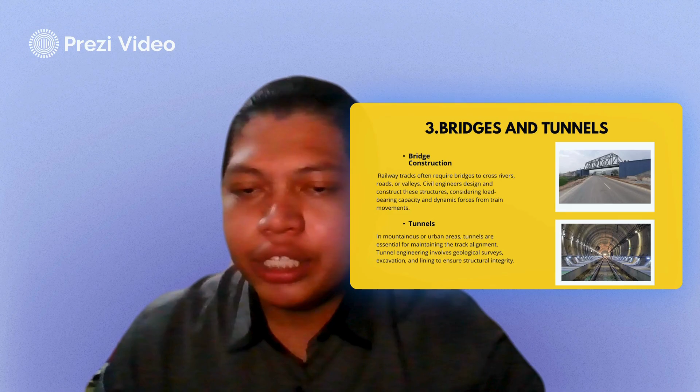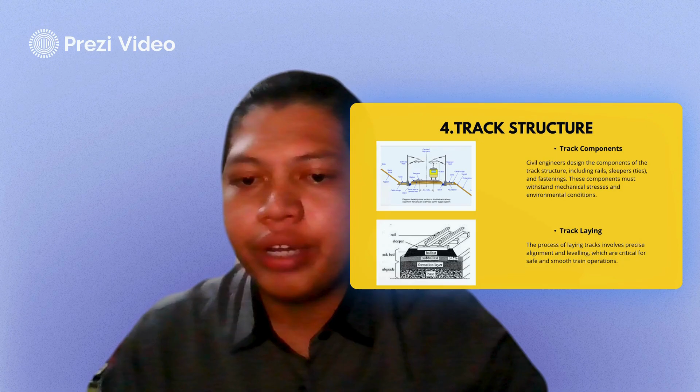Lastly, we have track laying. The process of laying track involves precise alignment and leveling, which are critical for safe and smooth train operation. That's all, thank you.

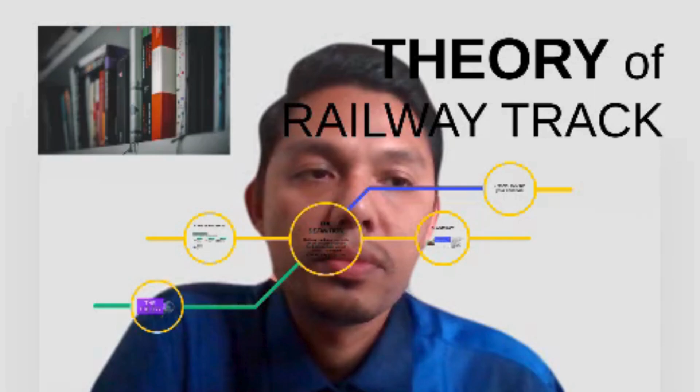What exactly is a railway track? In simple terms, a railway track consists of two parallel steel rails that guide the wheels of a train. These rails are securely fastened to sleepers, also known as ties, which are embedded in a bed of ballast. The ballast is usually made of crushed stone, providing stability and drainage.

The main function of a railway track is to provide a stable and smooth surface for trains to travel on, ensuring safe and efficient transportation. This design has been refined over centuries to handle heavy loads and high speeds, making it essential for both passenger and freight transport. Railway tracks are more than just steel and stone; they are the backbone of our rail transport system, enabling connectivity and economic growth.

Next, let's dive into the theory behind railway tracks. Understanding the theory helps us appreciate the engineering marvel that allows trains to operate smoothly and safely. Track geometry involves several critical elements.

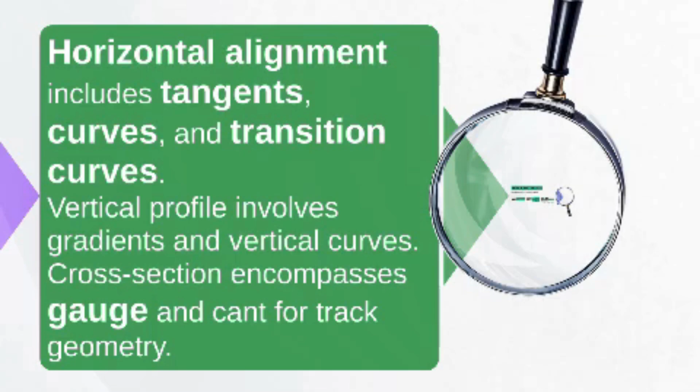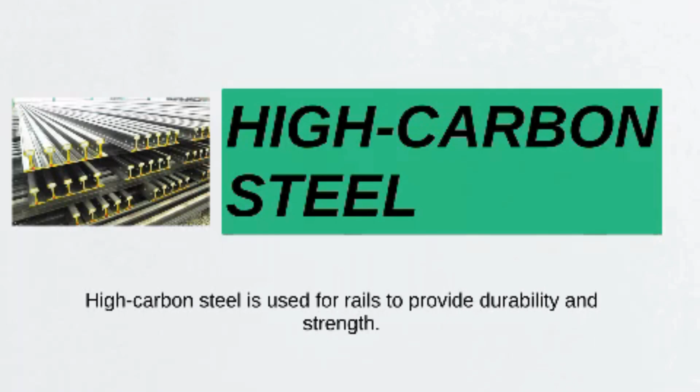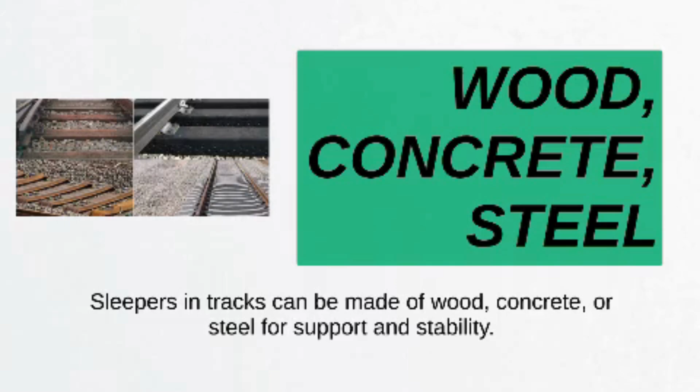The sleepers can be made from wood, concrete, or steel. Concrete sleepers are commonly used today because they are durable and require less maintenance. Lastly, ballast - crushed stone that provides stability, maintains track position, and helps with drainage. Properly packed ballast is crucial for the track's longevity.

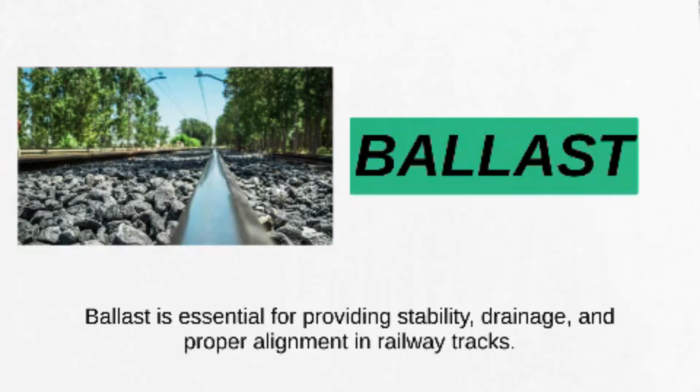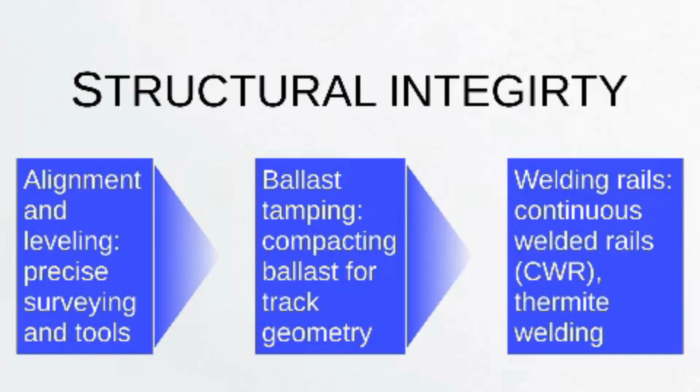Structural integrity involves precise alignment and regular maintenance. Alignment and leveling: the track must be correctly aligned and leveled to ensure smooth and safe train operation. This is achieved using sophisticated surveying equipment and alignment tools.

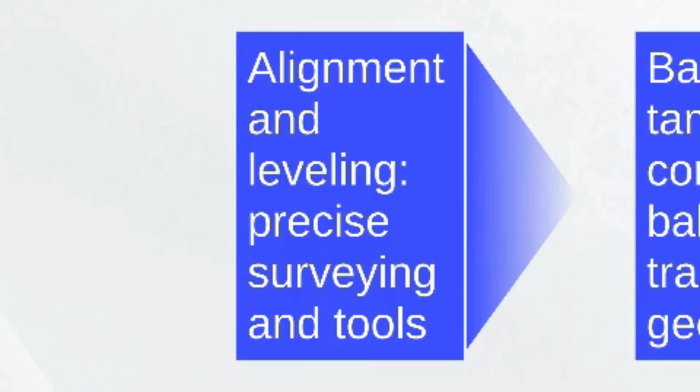Ballast tamping machines compact the ballast around the sleepers to maintain track geometry. This process is essential for preventing the track from shifting under the weight of passing trains.

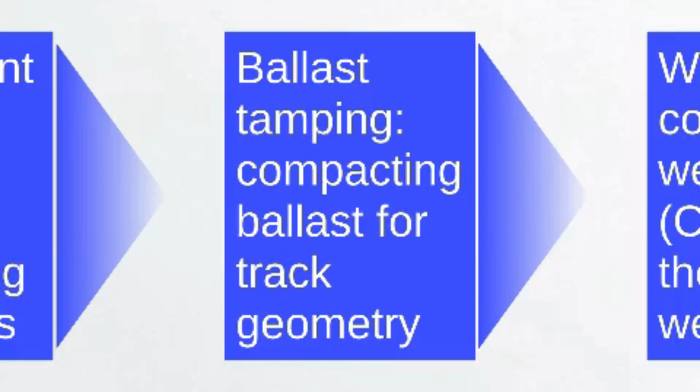Welding rails: modern track welding often uses continuous welded rails, or CWR, to reduce joints which can be weak points. Techniques like thermite welding are used to join rails seamlessly, providing a smoother ride and reducing maintenance needs.

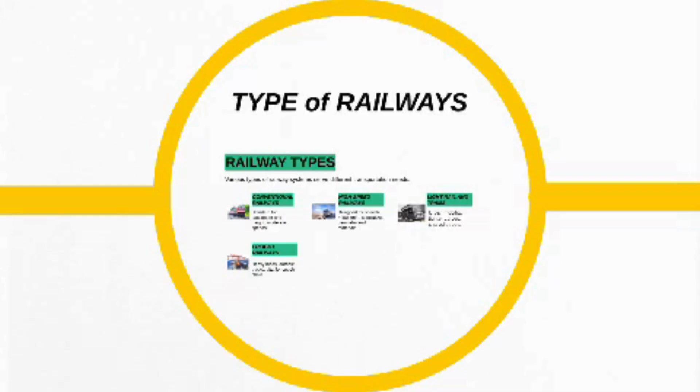Now let's go explore the different types of railways, each designed for specific purposes and conditions. Understanding these types helps us see how versatile railway systems can be.

Conventional railways are standard railways used worldwide. They are designed for both passenger and freight trains and typically have moderate speed. Conventional railways form the backbone of national and regional transportation networks, providing essential connectivity.

High-speed railways are engineered for speeds exceeding 250 km per hour. They have specialized track geometry with smoother curves and stronger materials to handle high speed. Examples include the Shinkansen in Japan and the TGV in France. High-speed trains offer rapid transit between major cities, significantly reducing travel time.

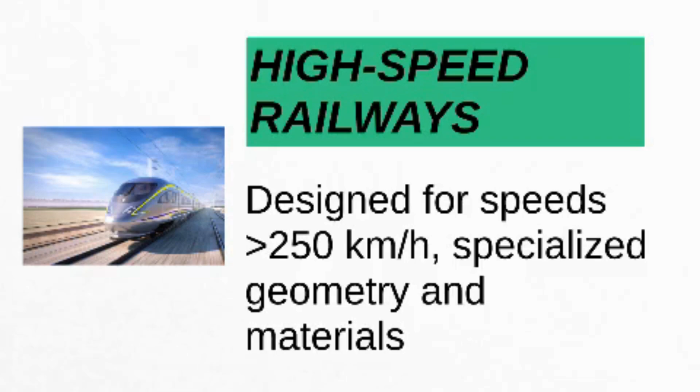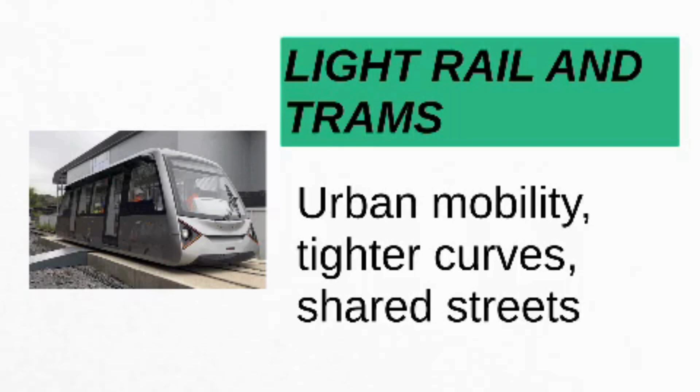Light rail systems, or trams, are typically used within cities for shorter distances. They are designed to navigate tighter curves and can operate on shared streets with other traffic. These systems are crucial for urban mobility, providing a convenient and efficient alternative to cars and buses.

Lastly, freight railways are designed to carry heavy loads over long distances. Freight railways are essential for transporting goods and raw materials. They often feature stronger and more durable track to handle the increased weight, and are a vital part of the global supply chain.

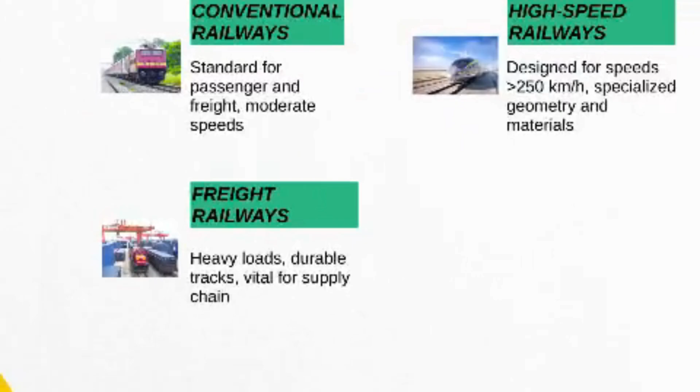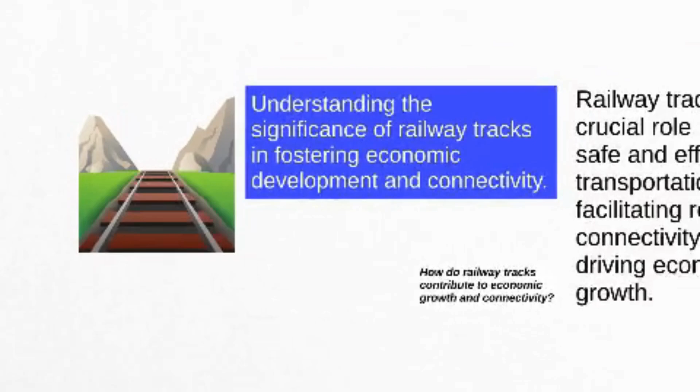So to sum up, we've covered the definition of railway tracks, the theory behind their construction, and the different types of railways. Railway tracks are a fascinating blend of engineering and practical design, crucial for efficient and safe transportation. They are integral to our daily life, enabling economic growth and connectivity across regions.

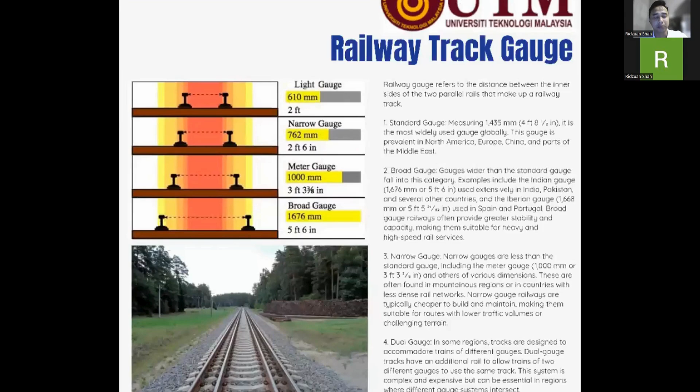Okay, we move on to the railway components. A rail track consists of a few elements, including the rails itself, made of steel, and the sleepers.

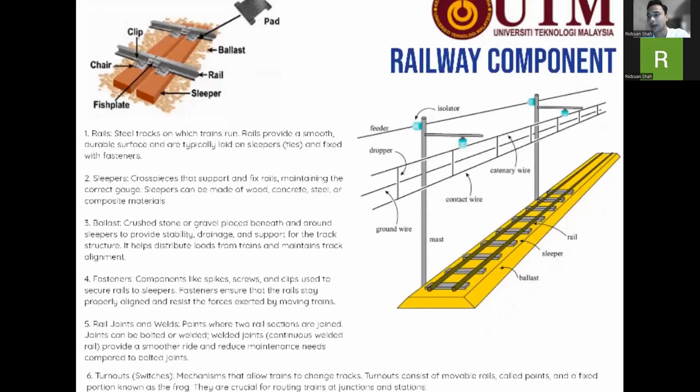Sleepers are usually made of timber or concrete, just to support and hold the position of the rail. We also have ballast, made of crusher run or aggregate, just to form the level to put the track on.

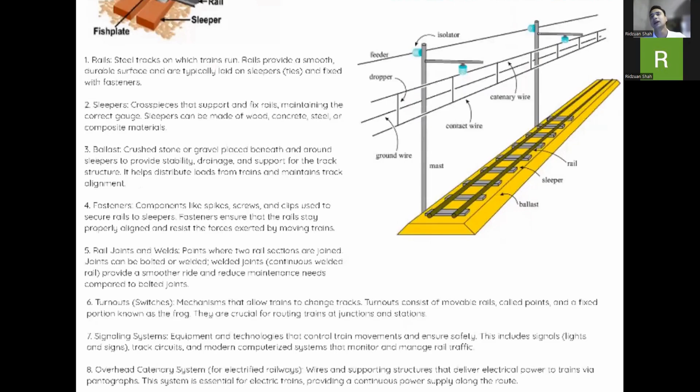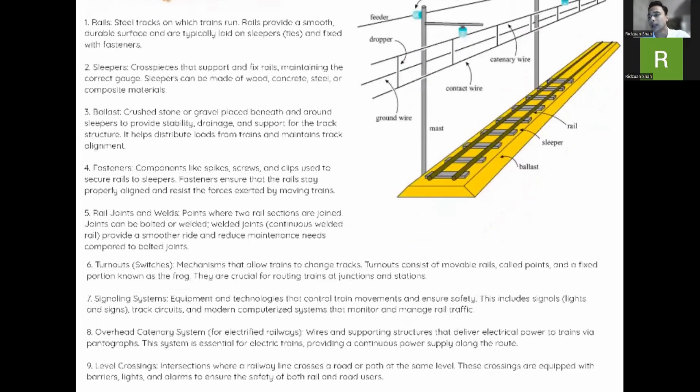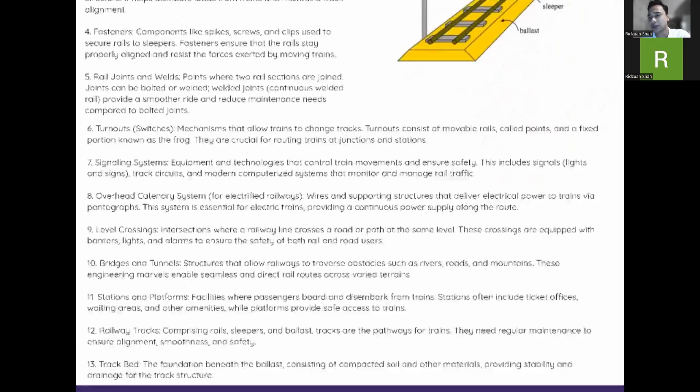Next, we also have fasteners to bind or hold the track to ensure it's in position. We also have rail joints, turnouts and switches, and the signaling system to support the operation of the train, as well as the overhead catenary system.

This overhead catenary system is used for electrified railways to supply electricity. You can see it on the track, connecting to the train itself.

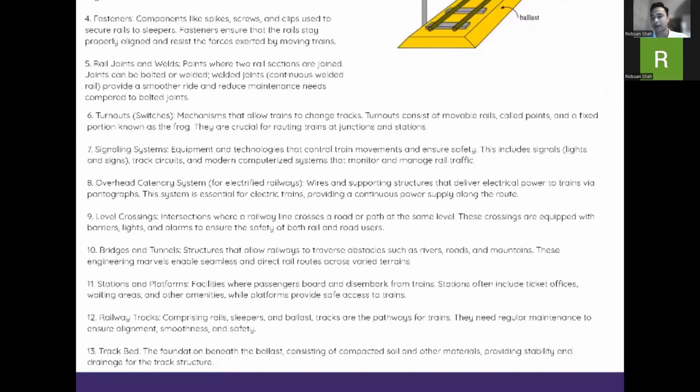Bridges and tunnels are another form of the track, but the components I mentioned previously still have to be present, whether it's on the ground, on a bridge, or within a tunnel. The station and platform are ancillary buildings to support the whole operation of the train, along with the railway track itself and the track bed.

So this is some photo for your reference, showing all the components that I mentioned previously.

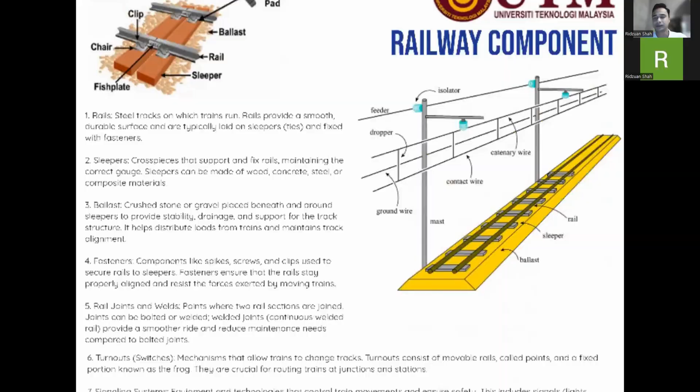Now I'm going to discuss our case study. We have decided to select one of the current projects that's ongoing right now, the electrified double track rail project from Gemas to Johor Bahru.

Under this case study, we are going to discuss the project background, types of railway track, the components of railway track, and how the construction is being conducted throughout this project.

The electrified double tracking rail project from Gemas to Johor Bahru marks the final segment of the KTMB network upgrade from single to double track.

Upon completion, this project will link the southernmost part of Peninsular Malaysia to Padang Besar, Perlis.

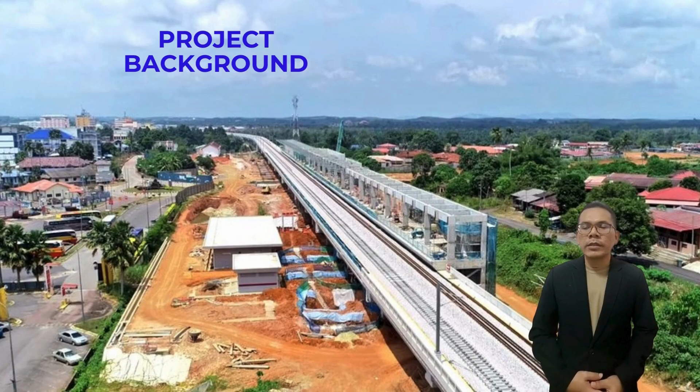The project encompasses 192 kilometers. The infrastructure work will include earthwork, ground treatment, drainage, tracks, box culverts, landscaping work, and hydroseeding turfing.

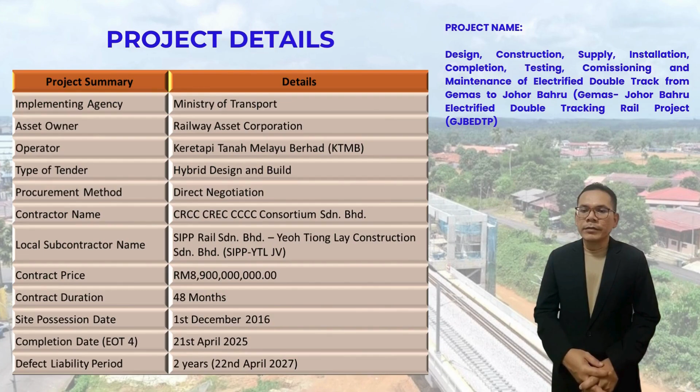The completion date, based on EOT number 4, is 21st of April 2025.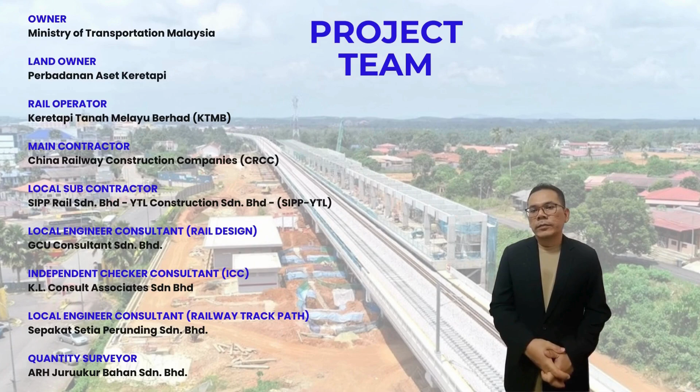The objective of this project: first, to provide comfortable, high quality and user-friendly rail services.

Second, improving the quality of rail infrastructure from Gemas to Johor Bahru. And last but not least, enhancing rail operation safety itself.

As shown here, this project's route distance is about 192 kilometers, and the operational speed of ETS maximum is 140 km per hour.

The best thing about this project is that throughout from Gemas to Johor Bahru, there will be 11 ETS stations constructed.

This project also has rail track on elevated rail at 3 places, which is at Buluh Kasar, about 0.5 km.

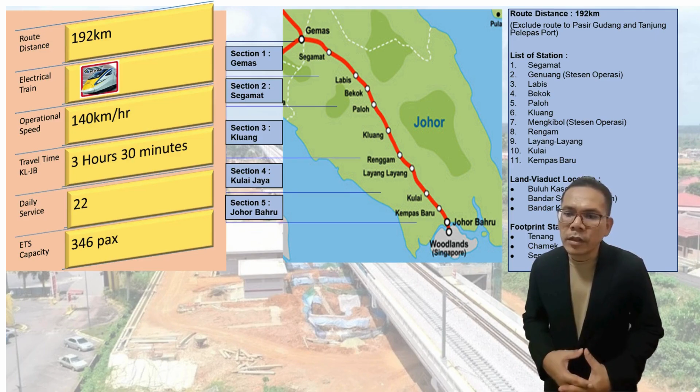The other elevated sections are at Bandar Segamat, about 6 km, and Bandar Kluang, about 3.5 km.

The scope of the project: first, constructing 192 kilometers of electrified double railway track, and constructing 11 stations along the route, as mentioned before.

Constructing electric train depots for both heavy and light maintenance, and constructing land viaduct bridges for elevated railway track.

Developing electrification, signaling and communication systems for the railway track, and constructing infrastructure works.

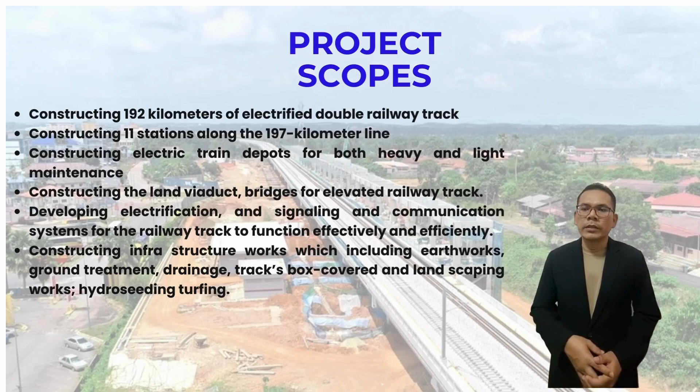This includes earthwork, ground treatment, drainage, tracks, box culvert, and landscaping work, hydroseeding and turfing.

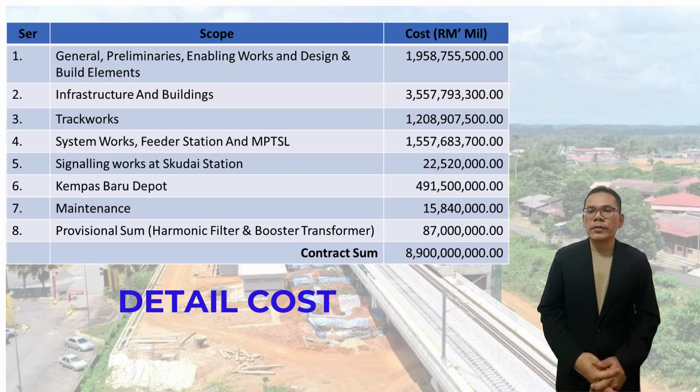Now the detailed cost of the project: the total contract sum is 8.9 billion ringgit Malaysia. The most expensive scope is infrastructure and building works, which earns about 3.5 billion.

Also shown here is the progress of the project as of the end of 23rd April 2024.

The progress is about 96.94%, which is a delay of about 0.05% from the target.

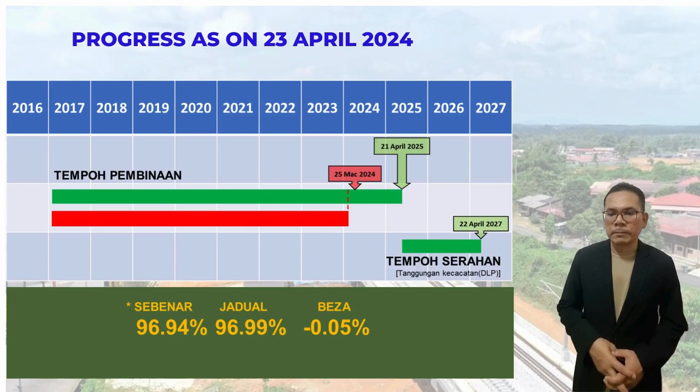Now I'm going to discuss the types of railway track being used in this project. Basically, there are 3 types of rail track.

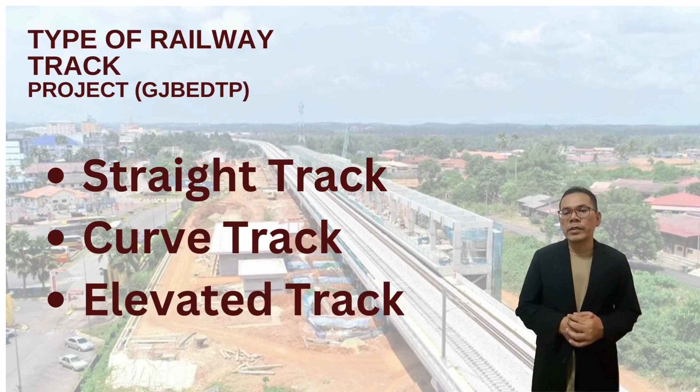First is straight track or continuous track, curved track, and elevated track.

A straight railway track is a section of railroad that is set out in a straight line without any curve or bends. Straight tracks are typically easier and less expensive to construct and maintain compared to curved tracks.

They also allow trains to travel at high speed, with no sharp turns to slow them down. Straight tracks are essential for long distance travel and high speed transportation, as they provide a smooth and efficient route for trains to travel.

Straight tracks also reduce wear and tear on the train wheels and tracks, leading to lower maintenance costs and improved safety. In terms of safety, straight track provides better visibility for train operators, allowing them to see far ahead and anticipate any obstacle or signal on the track.

This helps to reduce the risk of accidents and ensures smoother operation.

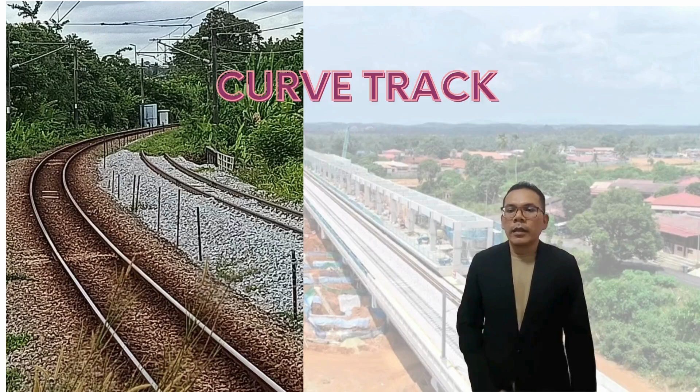Now I'm going to discuss curved track. In this project, they will use curved track, which is a section of railroad that is designed to follow a curve rather than being laid out in a straight line.

Curved tracks are essential for navigating around obstacles, following the natural contours of the land, and enabling trains to change direction.

One of the main challenges in designing and maintaining curved track is ensuring that trains can navigate the curve safely and efficiently. To achieve this, the curvature of the track must be carefully calculated to allow trains to travel at appropriate speed without excessive lateral forces or discomfort for passengers.

In terms of construction and maintenance, curved track require additional attention compared to straight track. The alignment and super elevation of the track must be carefully designed to ensure that trains can navigate the curve smoothly and safely. In this project,

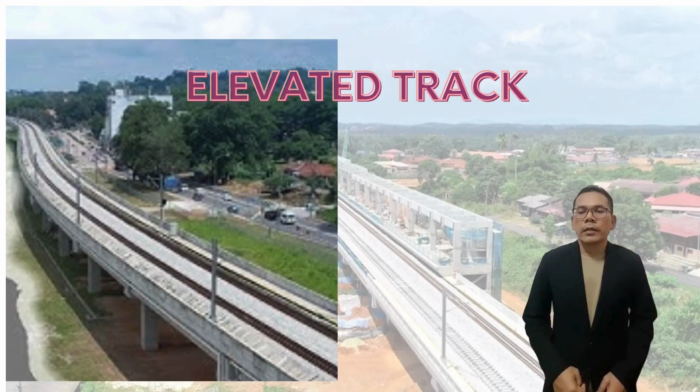they also have elevated rail track, which is a type of railway infrastructure where the tracks are built above ground level, typically on an elevated structure such as viaduct, bridges, or elevated platform. This design allows trains to operate on a raised platform separate from other forms of transportation like roads and pedestrian pathways. A crucial component of this project, the elevated railway especially serves multiple purposes and offers various benefits.

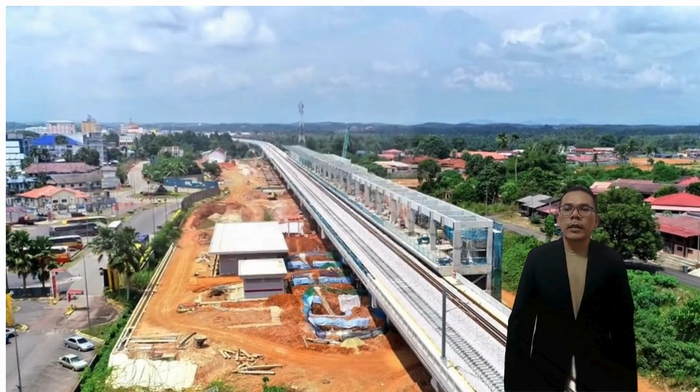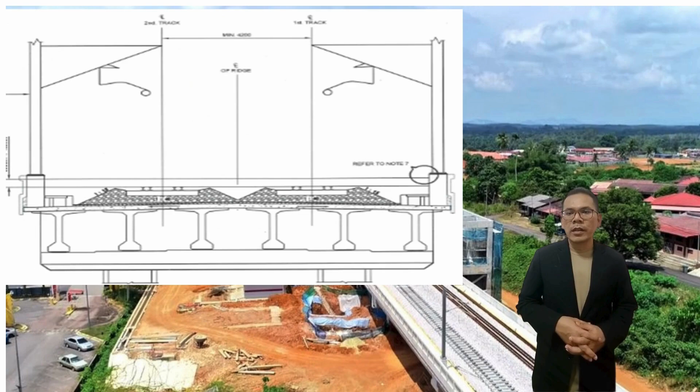The main railway track arrangement for an elevated railway is a sophisticated engineering endeavor that involves careful planning, design and construction. By elevating the tracks, railway can achieve better integration into urban environment, improve safety and enhance operational efficiency. The success of such a project depends on how you address the structural, operational and environmental challenges through advanced engineering and strategic planning.

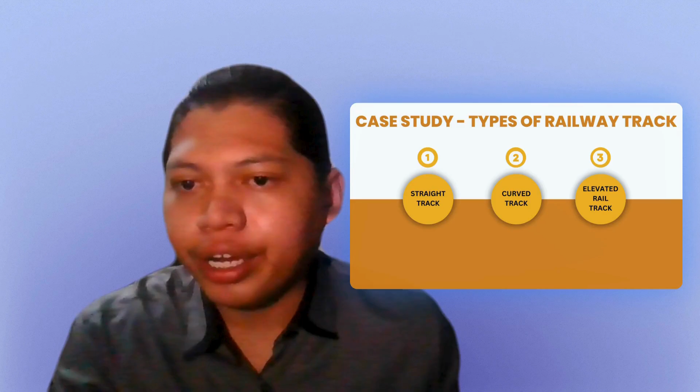For straight track, a straight railway track is a section of railroad that is laid out in a straight line without any curve or bends. Straight track are essential for long distance travel and high speed transportation as they provide a smooth and efficient route for trains to travel.

In terms of safety, straight track provide better visibility for train operators, allowing them to see far ahead and anticipate any obstacle or signal on the track. Overall, straight railway track play a crucial role in the efficiency, safety, and performance of railway transportation systems.

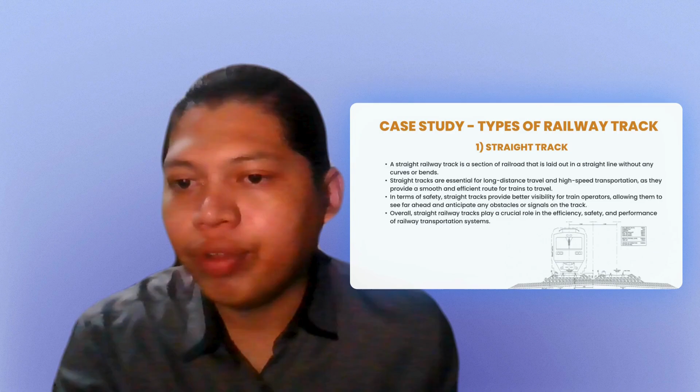Second, we have curved track. A curved railway track is a section of railroad that is designed to follow a curve rather than being laid out in a straight line. One of the main challenges in designing and monitoring curved track is ensuring that trains can navigate the curve safely and efficiently.

Curved track are often used in areas where the terrain is hilly or mountainous, as they allow trains to navigate around obstacles and follow the natural contour of the land.

In terms of construction and maintenance, curved track require additional attention compared to straight track. While curved track present unique challenges, they are an essential part of railway infrastructure, enabling trains to navigate complex terrain and providing flexibility in route planning.

Next, we have elevated rail track. An elevated track is a type of railway infrastructure where the tracks are built above ground level, typically on elevated structures such as viaduct, bridges, or elevated platform.

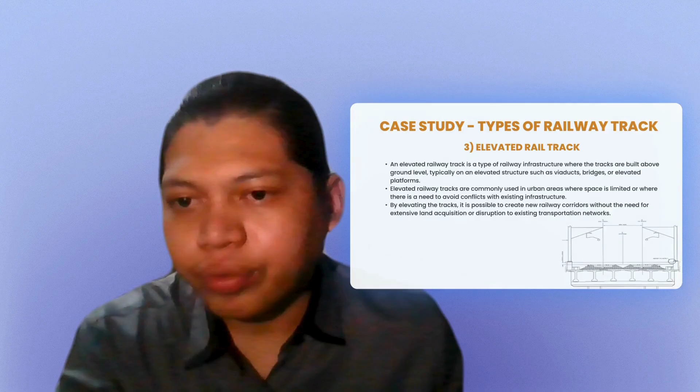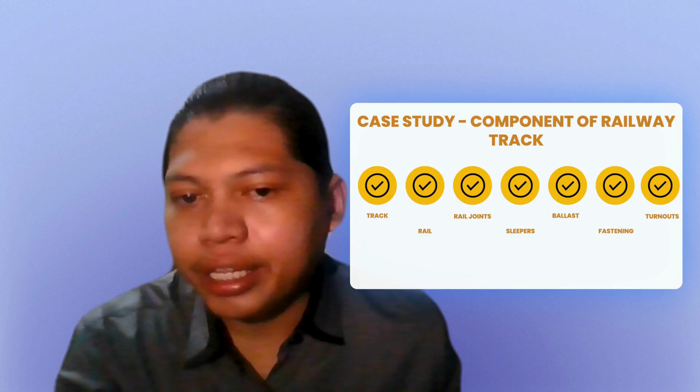Next, we have components of railway track in our case study. First, we have track, rail, rail joint, sleepers, ballast, fastening, and turnout. We will go one by one for these components.

First, we have track. The usual track consists of two steel rails secured on sleepers so as to keep the rails at the correct distance apart, the gauge, and capable of supporting the weight of the train.

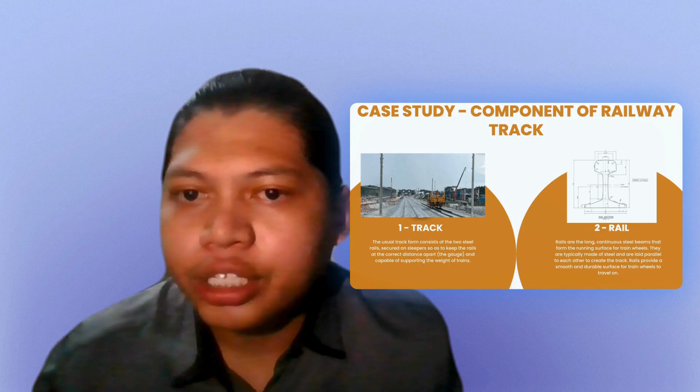Second, we have rail. Rails are the long continuous steel beams that form the running surface for train wheels. They are typically made of steel and are laid parallel to each other to create the track. Rail provide a smooth and durable surface for train wheels to travel on.

Third, we have rail joint. Rail joints are used to connect individual rail sections together. They allow for expansion and contraction of the rail due to temperature changes and help maintain continuity along the length of the track. Fourth, sleepers. Sleepers are essential horizontal supports that hold the rail in place and distribute the load from the rail to the underlying ballast.

They are typically made of wood, concrete, or steel, and are laid perpendicular to the rail at regular intervals along the track.

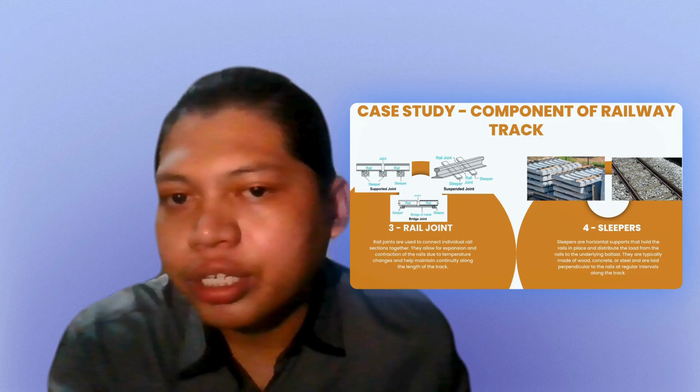Next, we have ballast. Ballast is a layer of coarse aggregates such as gravel, crushed stone, or slag that is placed beneath the sleepers to provide stability, drainage, and load distribution. The ballast helps to secure the track, maintain proper alignment, and provide a firm foundation for sleepers.

Next, fastening. Fastenings are the components that secure the rail to the sleeper. This includes rail clips, bolts, and other fastening systems that hold the rail in place while allowing for some degree of flexibility and movement.

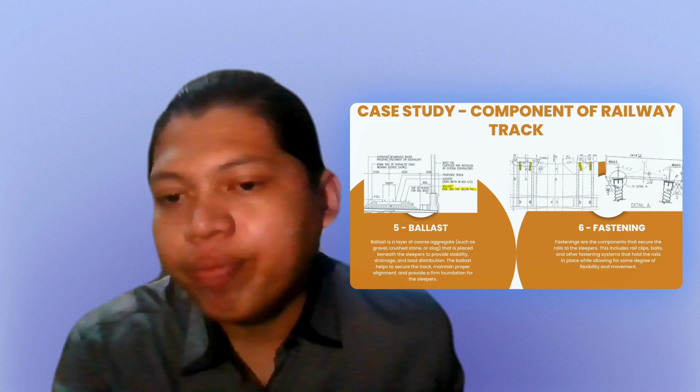Next, we have a case study for the method of construction for on the ground railway track. We have nine elements.

First, we have site investigation. Second, design and planning. Third, site preparation. Fourth, track formation. Fifth, track laying. Sixth, track adjustment and ballasting. Seventh, installation of ancillary systems. Eighth, quality control and testing. And lastly, final commissioning.

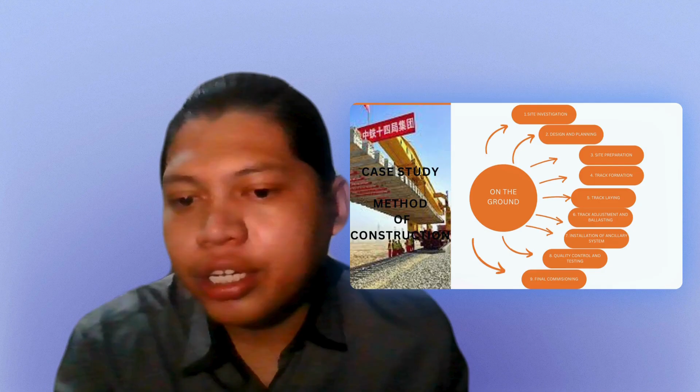Next, we have a method of construction for ground railway track. For this method, we have 9 items: first, site investigation; second, design and planning; third, site preparation; fourth, track formation; fifth, track laying; sixth, track adjustment and ballasting; seventh, installation of ancillary system; eighth, quality control and testing; and lastly, final commissioning.

For the first item, site investigation: assess the terrain, identify natural features, and map the area. Analyze soil and rock type to determine ground stability. Study water flow drainage and potential flooding issues. For detailed survey, conduct borehole soil sampling and lab testing to understand soil properties.

Second, design and planning. Design the track layout including curve, gradient, and straight section. Plan the foundation layer to support the track. Design the layer above the subgrade including ballast and subballast. Plan a system to manage water and prevent track flooding.

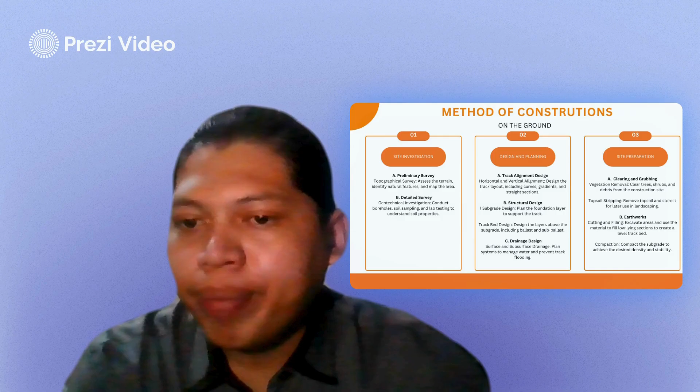Third, site preparation. Clear the trees, shrubs, and debris from the construction site. Remove topsoil and store it for later use in landscaping. Excavate the area and use the material to fill low-lying sections to create a level track bed. Lastly, compact the subgrade to achieve the desired density and stability.

Fourth, track formation. Grade and shape the subgrade according to design specification. Apply soil stabilization technique if necessary, such as lime or cement treatment. Lay and compact the subballast layer to provide a stable foundation for the ballast. Spread and compact the ballast layer, ensuring it is evenly distributed and level.

Fifth, track laying. Place sleepers at specific intervals and align them correctly. Use appropriate fastening to secure sleepers to the ballast. Position the rail on the sleeper. Secure the rail to the sleepers using clips, bolts, or other fastening systems. Weld rail joints to create continuous welded rail (CWR), or use bolt joints for shorter sections.

Sixth, track adjustment and ballasting. For track alignment, adjust the track to achieve the desired alignment. Use a tamping machine to pack ballast under sleepers, ensuring track stability. Regulate and profile the ballast to ensure proper drainage and stability.

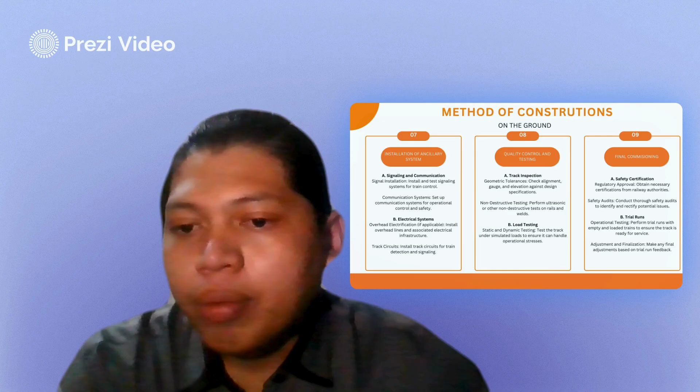Lastly, final commissioning. Obtain necessary certification from railway authorities. Conduct thorough safety audit to identify and rectify potential issues. Perform trial runs with empty and loaded trains to ensure the track is ready for service. Lastly, make any final adjustments based on trial run feedback.

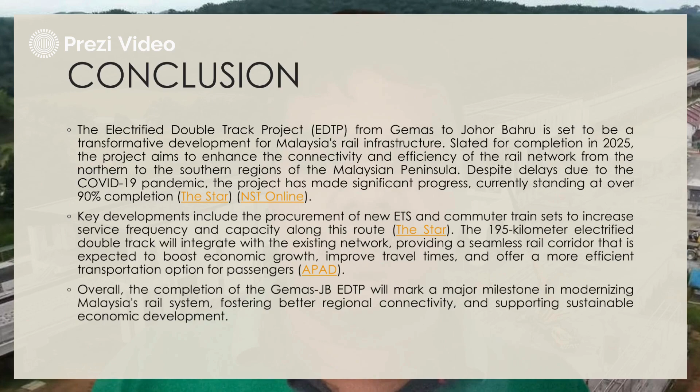Next is future development. The Electrified Double Track Project from Gemas to JB is progressing towards completion, with an expected operational date in 2025. The project is currently over 90% complete, recovering from delays caused by the COVID-19 pandemic.

There are three key future developments for the project. First, procurement of new trains: the Malaysian Transport Ministry is acquiring 10 new sets of ETS and 6 sets of commuter trains to enhance service frequency along the new Gemas-JB line.

Second, completion and integration. The 195-kilometer line will complete the double-track electrified network from the northern region of Malaysia to JB, significantly improving connectivity and reducing travel time between these regions.

Third, enhancement in passenger service. The new infrastructure aims to boost the capacity and efficiency of rail transport, making it a more viable option for passengers traveling between Kuala Lumpur and Johor Bahru. The enhancements include improved facilities and increased frequency of service to meet rising demand.